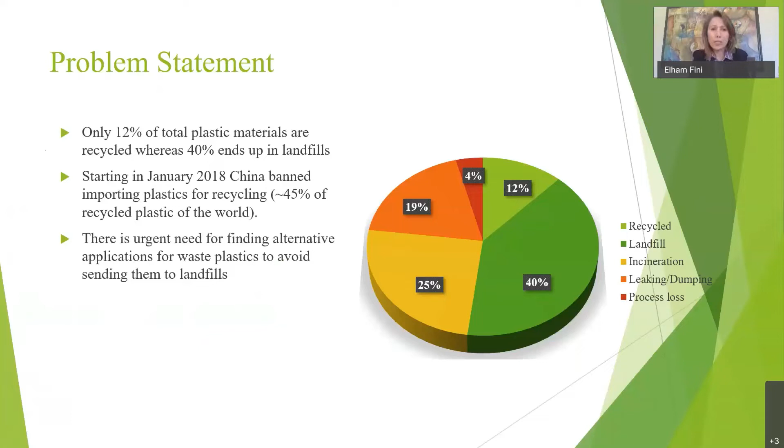So what if we could actually turn it and recycle it to its original building blocks to use it again and again, instead of reusing it, instead of making more new product. So there is an urgent need, really, to get this 40% here out of this pie chart and turn it to application. So the supplies are there, and you may think of it as a no-brainer, so why aren't we doing it? Well, some of the plastics are quite hard to recycle.

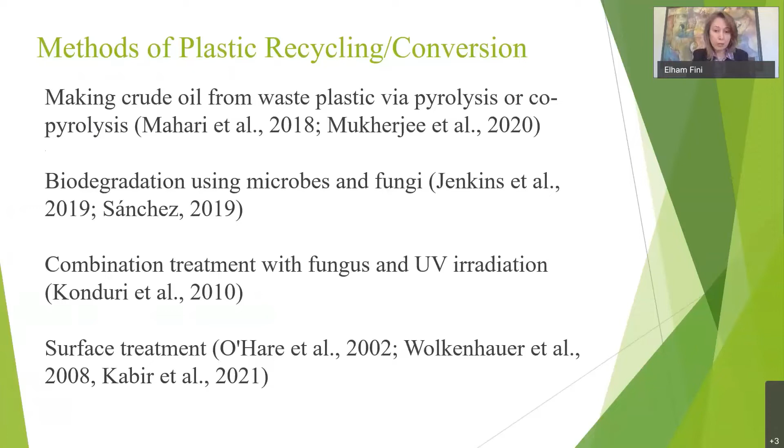And the talk I'm going to give you today is also part of surface treatment, which my PhD student, who is now my postdoc in my group, is working on. We actually work with Thermo to get some of these experiments done, so thanks for their help. We published this work in a journal paper, which I mentioned in the disclaimer in case you are interested.

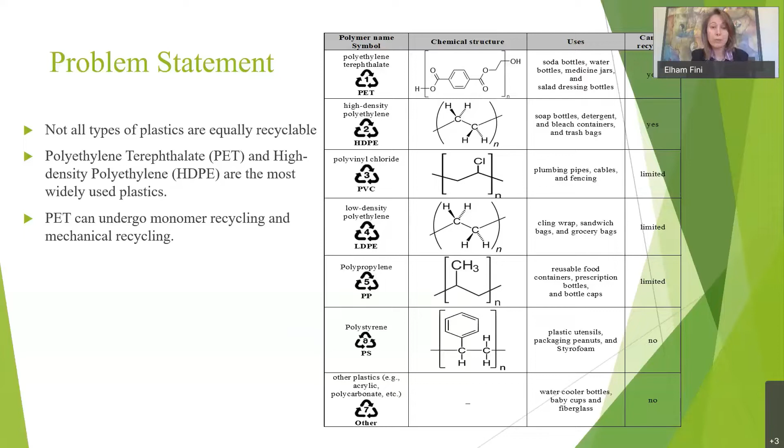Some of the methods I mentioned, which we also do in the lab, involve pyrolysis and thermochemical liquefaction. We get oil, but most plastics turn at that point into oligomers, and many of them are heavily degraded. So the process we are talking about here today is to minimally degrade the plastics. We're not breaking it back to the monomers. We are actually using them as a compatible product for construction.

Those of you who are familiar with construction, you see the roads you drive on, or the walls and floors in the building where you're sitting, are mostly made out of aggregates and some sort of glue, which could be cement, that puts things together. On the road application side, we again have stone aggregates, which could be granite, limestone, sand, whatnot, plus a glue, which for road applications is mostly asphalt, that black gooey product that keeps things together.

So we thought these granules made out of plastics, if they are compatible with the rest of the construction material, could actually play a role as a building block and be part of the whole construction. They won't be released to the environment. Plus, they are pretty durable.

If you imagine, one of the reasons that we are dealing with this huge plastic problem is because they actually take a long time to degrade, over 100 to some 300 years. So they are durable. And in this case, we thought if we can use this as granules that are compatible, maybe it works for the durability of the road. So here is the process that we use.

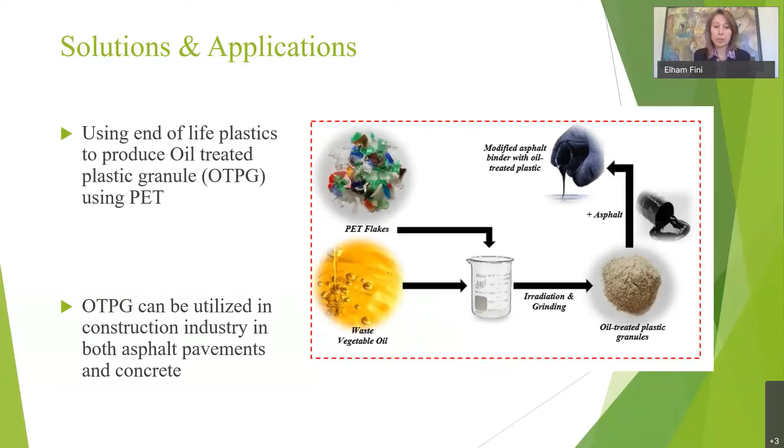I'm going to talk a bit more on the asphalt roads, because in America alone, we have 4 million miles of roads. And if we manage to use it safe and sound in the road construction business and improve the durability of roads, it's quite a win. And we can use a lot of plastic in that way. So what we made here, we called it oil treated plastic granules. It stands for OTPG. So OTPG is basically those granules that can now go into the construction material, either asphalt or concrete. So I show you a bit of characterization on this plastic.

So obviously someone may think, why don't I just grind this mixed plastic and dump it into the construction material? Well, the problem is segregation, because the plastic doesn't like cement or asphalt by itself, and they're gonna separate. So as soon as you're mixing and placing it down, your plastic will go to one side and the rest of your material will go to the other side. You don't want that. You want a very nice homogeneous mix. And that's why we have to make the plastic like the rest of the material. And to do so, we use the oil treatment and in some cases, carbon coating.

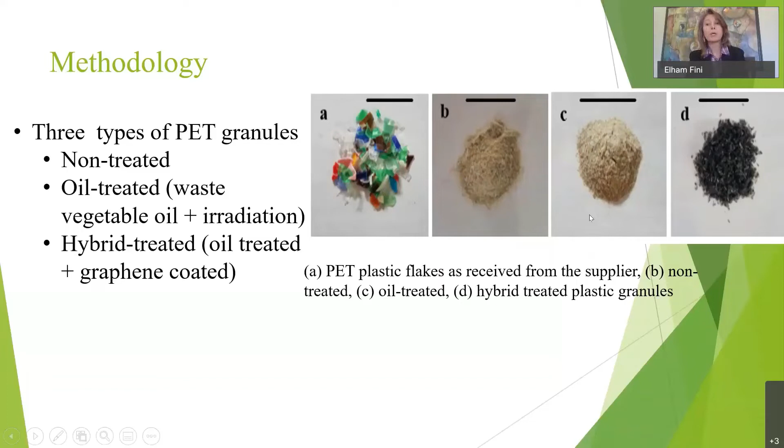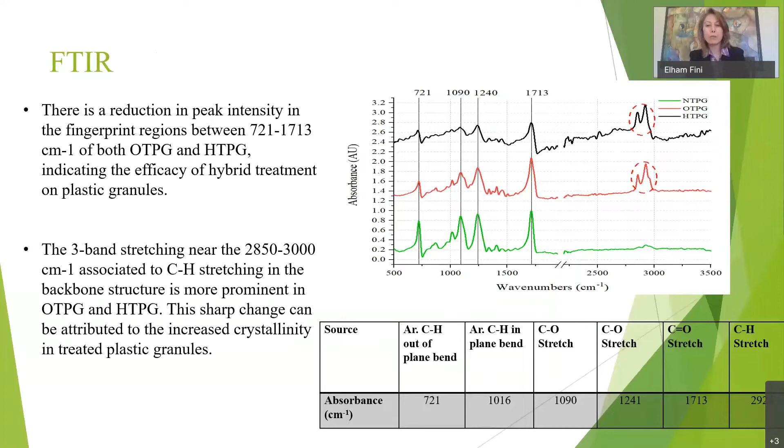A sharp peak here in this range, you can see, is an indication of the crystalline structure. So we know that with this treatment, we make the granules even more crystalline. And on the other hand, it helps us with the structure of the whole composite when we have more crystalline plastic. But that was not the main focus. As I mentioned, the surface treatment and making it compatible was the first goal, but we got this added advantage of more crystalline structure.

Here is the Raman spectra, which we got with the help of Thermo Fisher colleagues. They helped us get some of this data and analyze it. Of course, they are on the co-authorship of the paper as well. So this one, the ratio of the 1095 peak to 1115 is 1.3 for non-treated and 1.6 for oil treated. So you can see the increase here. And they also have a shift in this, which is another indication of crystalline structure.

We needed to figure out what happens to the plastic structure itself, because at the end, we need to analyze the composite and figure out what's the role of these new granules, which is non-traditional. In typical building, we never use plastic granules. So we had to know exact properties of these granules to predict the behavior in the construction.

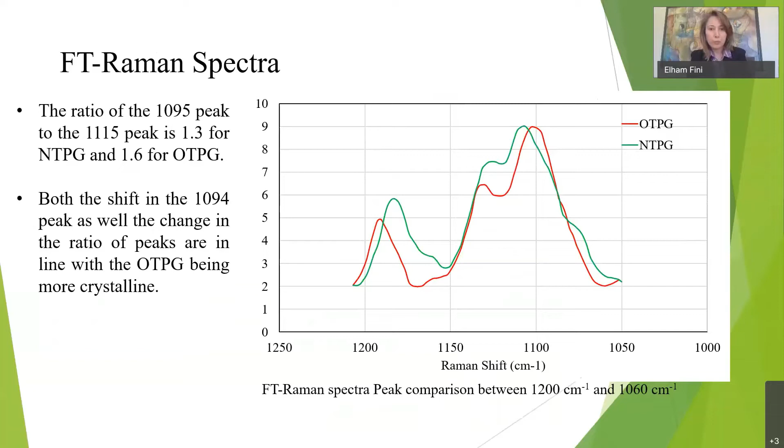And one other characteristic that was very important was the surface property of these granules. As I mentioned, plastic itself doesn't like construction material, doesn't like cement or asphalt. In this case, we actually changed the surface energy. You can see from 91 before treatment, this is the neat sample, to 142 after treatment. So this 55% increase in the surface energy, in the dispersive forces, shows the interaction would be enhanced when we mix it with other construction material.

And this was a strong evidence or motivation that if we can increase the surface energy by this much, then we should be able to make it like the rest of material and not separate, not segregate. So let's see if it worked. So we increase the surface energy with oil treatment by biografting the biomolecules on top of the surface of the plastic. So literally your plastic now is carrying all these biomolecules around it and is not the same as typical plastic; it is basically hosting all these biomolecules around it.

So the first test we actually did was the segregation, because we wanted to know if this plastic would like the rest of the material. Here you can see if you actually put the neat plastic, like you just get a bottle of water and grind it to the right size and put it in asphalt for road, that's how much segregation you get. And it's terrible. If you get this much segregation, as soon as you place your road, this material will separate and your road will start cracking and falling apart.

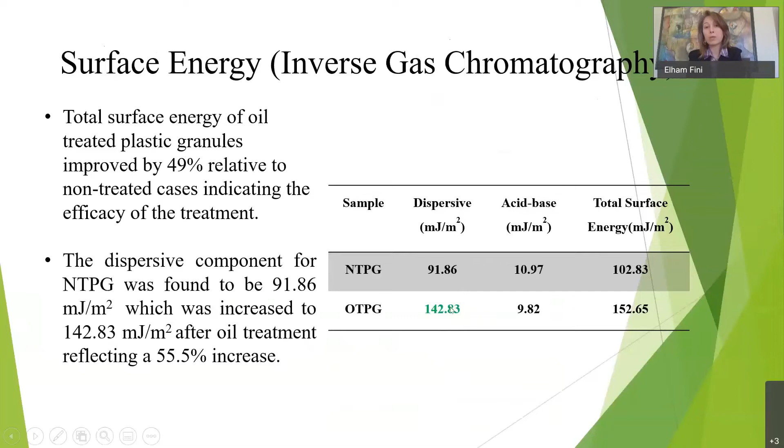So look at this again. When we changed the surface energy from 91 to 142, we made them like asphalt much better. And that's evidence here. So we made it go from 132 to 18 just because they like each other. They don't want to separate anymore. Here you can see we reduce it to 18 and 25, which is 86% improvement. Carbon was a bit higher, because the carbon coating literally covers some of the biomolecules and reduces their efficacy; they are not seeing asphalt, they are blinded by carbon on top. But still it works fine, 25.

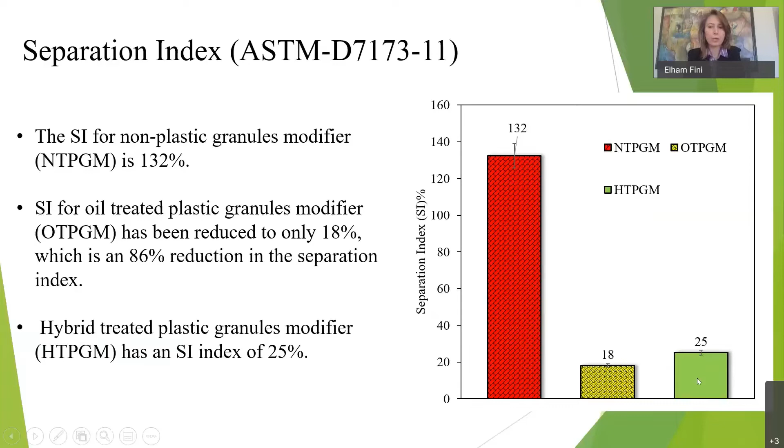So then we had to do all the characterization in terms of performance. So here is viscosity, and I put the ASTM standard in case you want to know the exact detail of the test. It is a standard test we use all the time. Road authorities use it for quality control and quality assurance. Here we actually test the flow of the material. You need to be able to mix, compact and place it. If it's too stiff or too fluid, it's not good. You want the right range.

So here we can look at the material that was neat. These are neat plastic, which we already showed is pretty bad and not going to be accepted because of segregation. But still, we went ahead and tested it in terms of viscosity. The viscosity was around 6,000. When we used the oil-treated, the bio-grafted one, it actually reduced significantly. The yellow columns here are the oil-treated, and the green is the carbon-coated following the oil treatment. The standard temperature that we use in road application is 135 C.

So any number at 135 C is the number we look at. And here, the red is just too high. Green is a bit high as well, but the yellow here, the oil-treated, meets the spec. So it could be approved just based on this viscosity here. Of course, there are a bunch of other tests to make sure it meets the road authorities' requirements, but that's one test here.

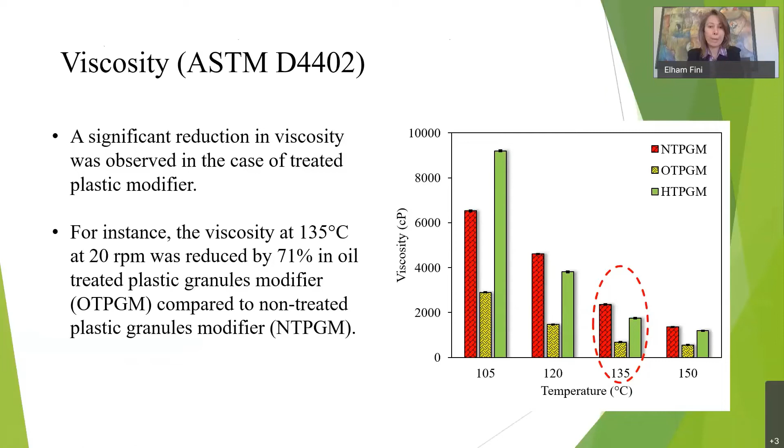Other tests are also required in the Superpave specification, which is the code we use in the asphalt industry, to check for cracking and for fatigue. I put it here as fatigue resistance. You may think, what is fatigue resistance? Well, think about the traffic. As cars keep passing on the roads, they make the road fatigued. And we want good resistance against that repeated loading.

For that, we have this measure, which is a standard used in the Superpave specification, G star multiplied by sine delta, a rheometry characteristic. We basically measure that and then compare it for different samples. Again, you can see the red, the yellow is the oil-treated one. And the neat here is the asphalt that doesn't have any plastic. So this is basically just what you use today on the road.

And you can see this is 34. With plastic, with all the benefits that we will talk about with having plastic in, we got 38, so very close. And here it says a lower value is preferred. So with the green, we even got a lower value than this. Of course, the red was way too high. I'm just putting the red here, even though it's rejected at the very first test, just to have a comparison and benchmarking, but this won't be accepted because it's not compatible.

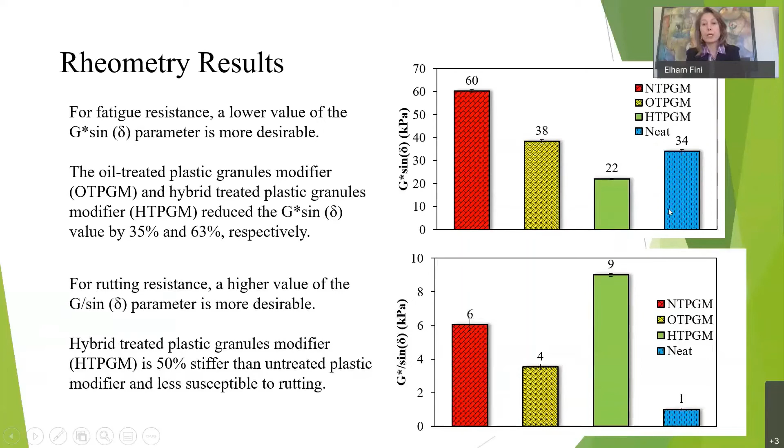And again, here, for the low temperature, relative to other samples, the hybrid treatment did pretty well. Here, the graphene coating, the hybrid coating, helped big time with the stress relaxation, which was really impressive. You can see compared to these other two samples, you have higher stress relaxation, meaning it doesn't accumulate the stress to cause cracking. So with this series of tests, we actually got the performance characteristics. It seems it meets the criteria that we typically use.

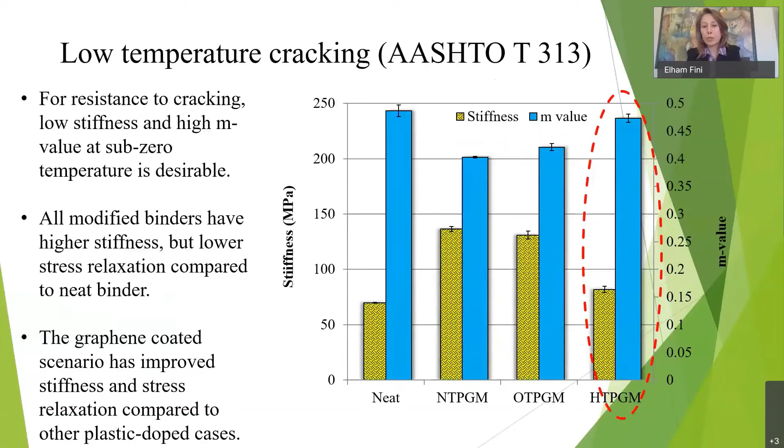But then what about long-term aging? After the plastic is in our road for many years, is it going to age the same way? I'm sure you have seen a brand new road, beautiful, black, smooth, and you have seen an old road full of potholes and cracks and so forth. So what about the plastic road? Does it make it less aging, better in resisting aging, or worse?

So here we actually did the accelerated aging in the lab, and we exposed it to harsh UV, ultraviolet radiation. And that's actually pretty relevant in summer season. If you imagine the summer of Arizona, where I am from, it's quite intense. We get 320 days of sun, and it's pretty intense in summer. So UV aging actually makes the roads damage or age pretty fast. So we did that in the lab, and we compared the neat with the plastic ones.

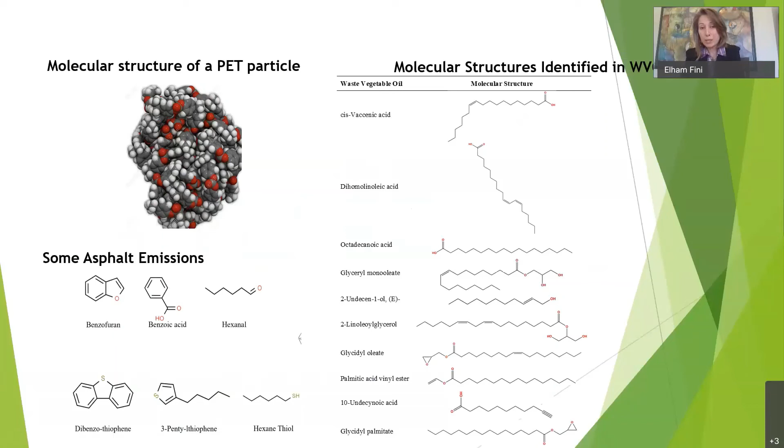So we looked at the molecules of PET. This is the PET covered or biografted. This is the oil grafted one. And these are the molecules of asphalt that run away through its life. So as they run away, your asphalt gets older because it loses some of its essential components. And these are essential for the life of the road, but they leave. So here with this mechanism, the oil-treated one actually keeps these molecules in the road by having a good interaction energy with them.

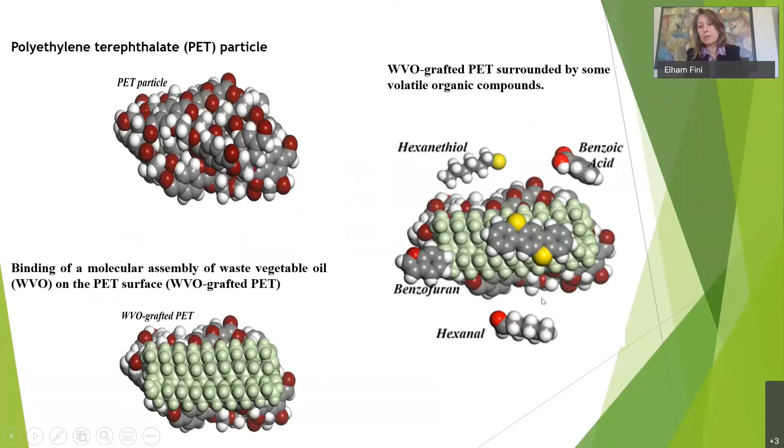So this last part of the study is still being completed, and anyone interested is welcome to contact me for more information.

But overall, we found that actually including the PET or end-of-life plastics in asphalt roads helps, provided that it is compatible. So I want to make sure this qualifier is there, because you cannot just grind and dump plastic into the construction material because they're not compatible. And they're going to separate, segregate, and it will be a disaster. So if we are using end-of-life plastics, we make sure that it's compatible. And that's what I put in the first bullet here.

We show that oil treatment improves crystallinity of PET, so you actually get better granules than the non-treated one, which then gives you better stiffness and better properties in your composite. We also show that this whole improvement is attributed to the biografting, which increases the surface energy dispersion forces after oil treatment. So 86% reduction in segregation was observed in this scenario, and that was attributed to enhancement of surface energy, surface interactions.

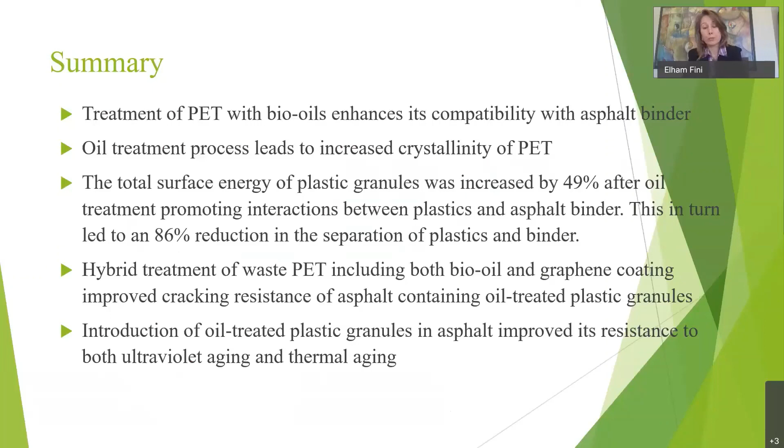So I wanted to also make sure, because this is sort of out of the box, turning plastic into a construction material and maybe having roads and buildings from it. I want to also emphasize that we have something at ASU called ICU, and this is not hospital ICU, it's actually invention culture by you. So many of the inventions in this talk were actually generated by students of mine who came up with these brilliant ideas, and as I mentioned, they are now being protected by a few provisional patents, and they all came from ICU.